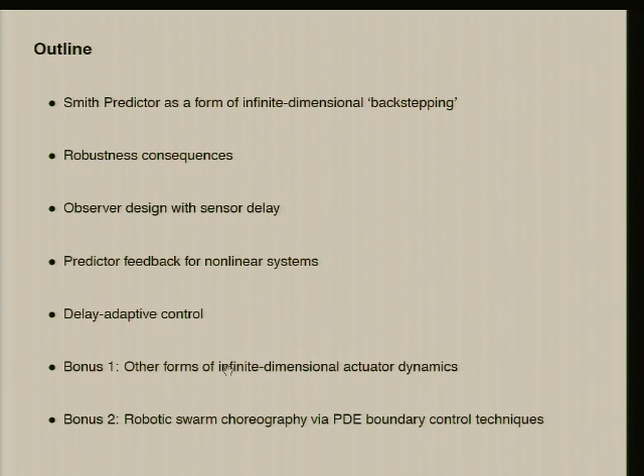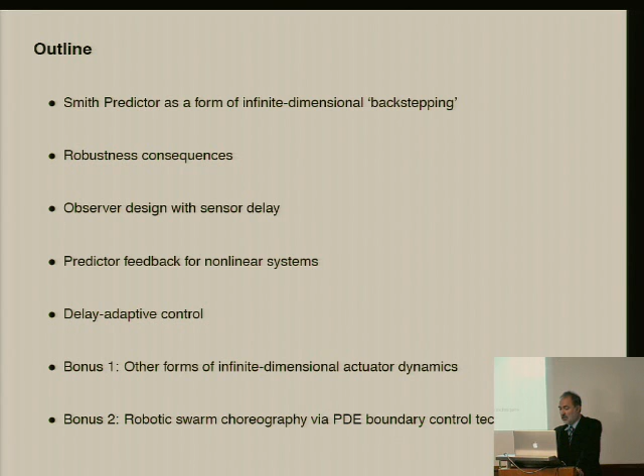And finally, just not to completely disappoint the network control systems people and people who expect such things in a CITRIS talk, I will talk about a new subject that is linked to control PDEs in robotic swarming or coordinated motion control.

So, delay systems arise in many applications. I don't think I need to spend much time on this slide. Probably you've been involved in at least one or more of these applications over the years.

And here's what I've learned after getting into delay systems. This is a topic that started getting some systematic and analytical attention in the late 1940s, starting with a paper by Tsypkin. It may not be so well known that there was a major emphasis on delay systems in the 70s and the early 80s, involving a large number of very prominent people that we know for contributions in other areas. In that period, many people were working on the so-called systems over rings, where the focus is on delay problems.

There was another burst of activity in delay systems after the introduction of LMIs in the 1990s, but many basic problems still remain unsolved, and it's still a very interesting area. So,

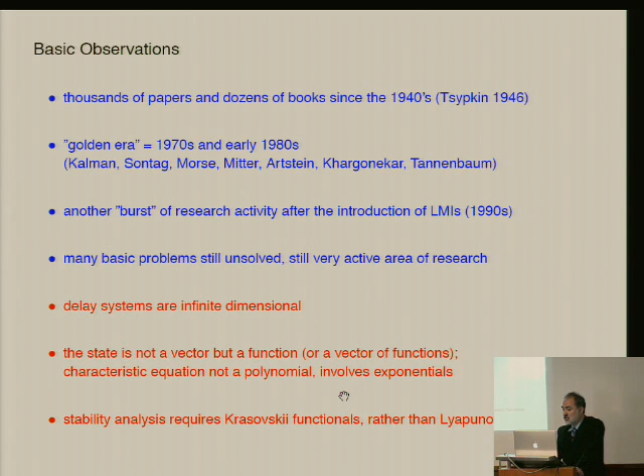what are the main technical observations about delay systems? They're infinite dimensional. The state is not a vector, but a function or a vector of functions. The characteristic equation is not a polynomial, but it involves exponentials. And the stability analysis does not succeed with simple Lyapunov functions, but it requires functionals, integral expressions of some sort.

Let me give you a flavor for what are the basic issues in control of delay systems through three scalar toy examples. So the first of these three examples, this is scalar. X is a scalar variable. This is a control. For d equal, when the delay is 0, this is an unstable system.

When the delay is non-zero, this is a very easy problem. You can either cancel this destabilizing term using the measurement of the past value of the measured state x, or you can actually dominate it using high gain. You don't have to exactly cancel it.

The next problem involves a delay on the input. That's a totally different problem. That is a problem that the Smith predictor and various other extensions deal with. That can be a very hard problem. And I will talk about that one.

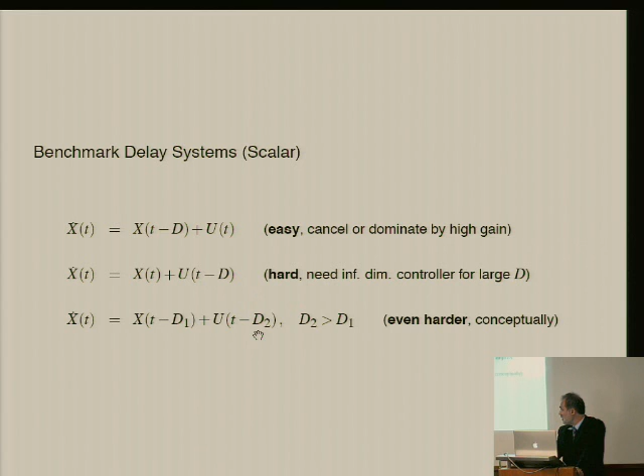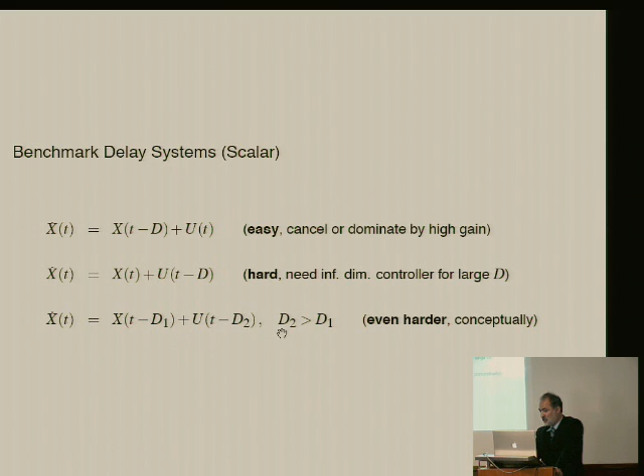The one that I will not talk about is a problem that involves simultaneous delay on state and control. Even when the state x is scalar valued, this can be a pretty hard problem, particularly if the delay on the input is longer than the delay on the state. And in the vector case, it's essentially unsolved at the moment. So I will focus on the second of the three problems.

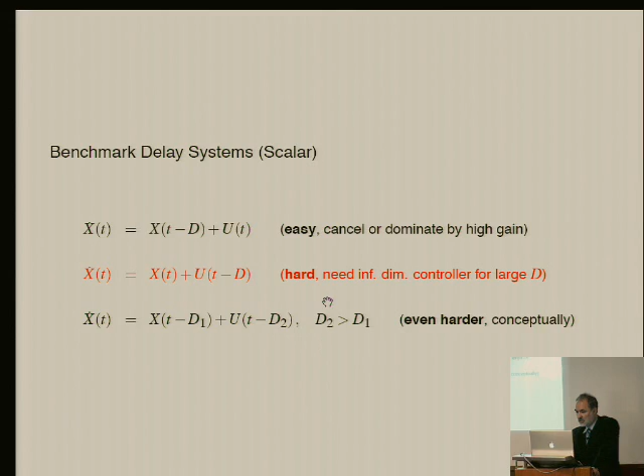So I have to admit that before getting into delay systems, I had not learned about these problems gradually. I knew close to nothing. I was working on control of PDEs and even didn't think that what I was doing would apply to delay systems. Simply because the results that I had up until that time were for PDEs involving at least 2 derivatives in space, whereas the delay involves only one derivative, only convective effect.

So I tried once, and here is how this went. This experience of mine, I think, is actually very useful. One can learn something and almost get excited about it.

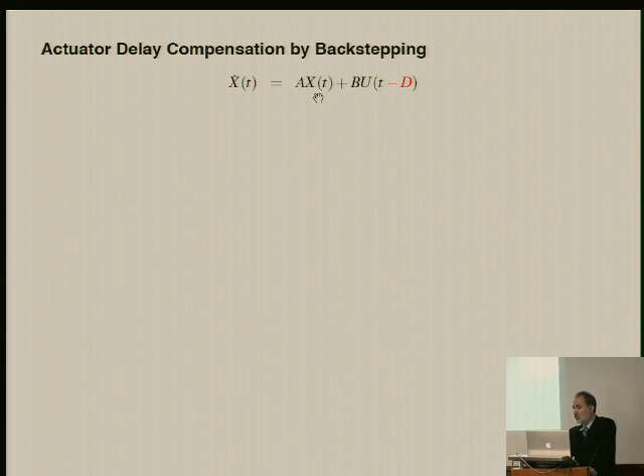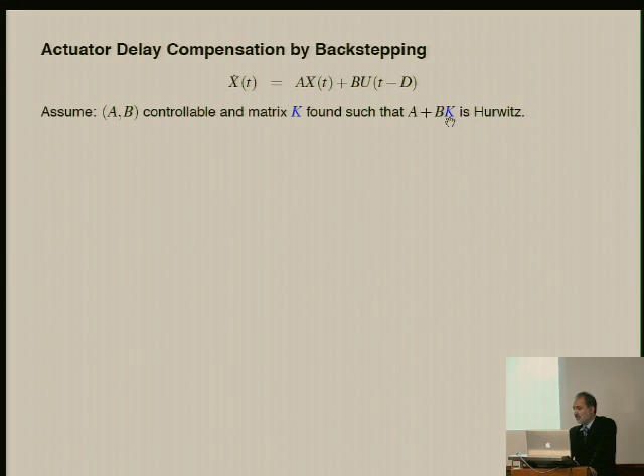So let me now consider a vector problem, so a full general linear controllable system with delay on the input. Let me assume that the pair AB is controllable, and let me assume that I have picked some nominal control K to stabilize the undelayed system. Now, let me go ahead and replace the

delay notation with a PDE representation. So let me represent this delay subsystem using a transport equation. So this transport equation is given here, this PDE. The output of the transport equation is the delayed input, and the boundary input into this transport PDE is the actual control.

So this is a very particular PDE, sort of the simplest of PDEs, and it can actually be solved in closed form if the input is given. So here's how the so-called backstepping method for PDE goes.

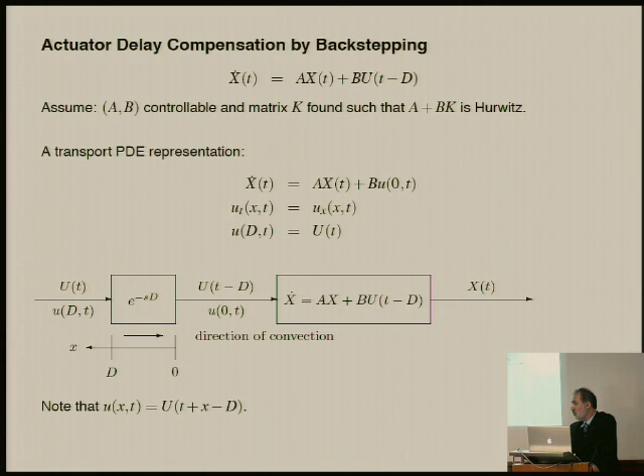Why think of this problem as a PDE problem? Well, because it is a boundary control problem. I have a cascade of a partial differential equation U with an ODE x, and the input enters at the boundary x equal to d of this PDE. So coming from that background, this is how you formulate this problem. Given that there are tools for boundary control in the context of this continuum or infinite dimensional backstepping, this is how you approach it.

You approach it by constructing an infinite dimensional transformation, a continuum transformation of the state of the actuator state U into a new state W. This transformation has a Volterra structure - this integral in y in the position y runs from 0 to the current x. So it's a lower triangular continuum operator, so to speak. There's also the ODE part in this transformation, which is crucial.

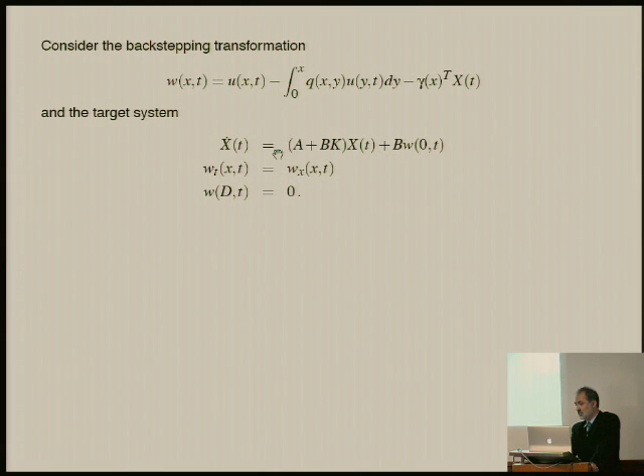Here's the objective: one wants to transform the original system into this target system using that transformation, and one wants the transformation to be invertible. This target behavior now consists of a cascade of a PDE and an ODE. However, the PDE is now an exponentially stable PDE - it's a transport equation with a zero input. So this thing goes to zero in d seconds. That exponentially stable system feeds into the stabilized ODE system. That's the basic premise of this backstepping approach.

After you plunge yourself into the algebra of determining the conditions when this transformation would achieve the conversion of the original system into the target system, you get these 4 conditions. This is also a cascade configuration. You have, in blue, an ODE - Gamma is a vector of the same dimension as x - and a PDE. Q is a function of 2 variables.

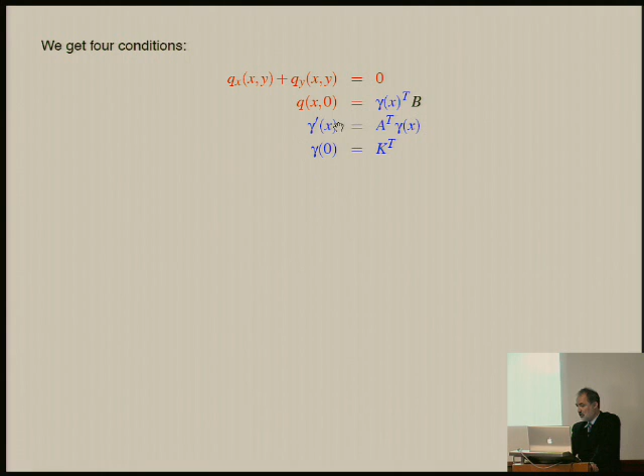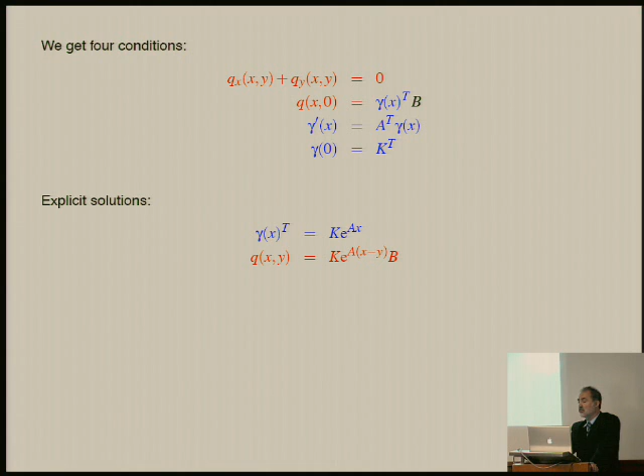You can actually solve both of them. The ODE just results in a matrix exponential, and the PDE can be solved because of its simple structure given this boundary input. So you get explicit solutions for both of these things. Rarely do we get something like that for more general PDEs like parabolic, second order hyperbolic, and so on. But for this delay problem, one can solve this explicitly. So plugging that in, here is the explicit solution of that backstepping transformation.

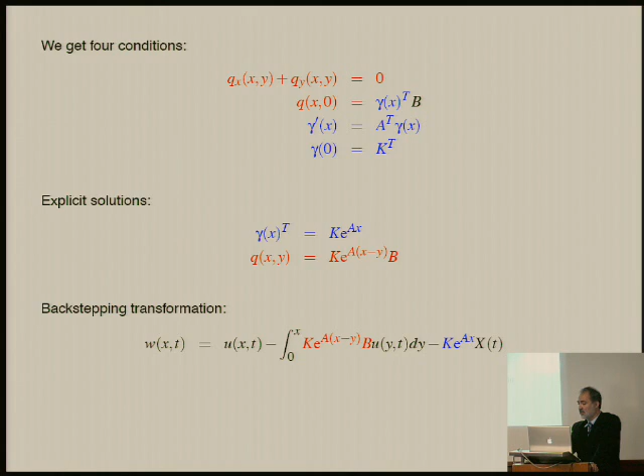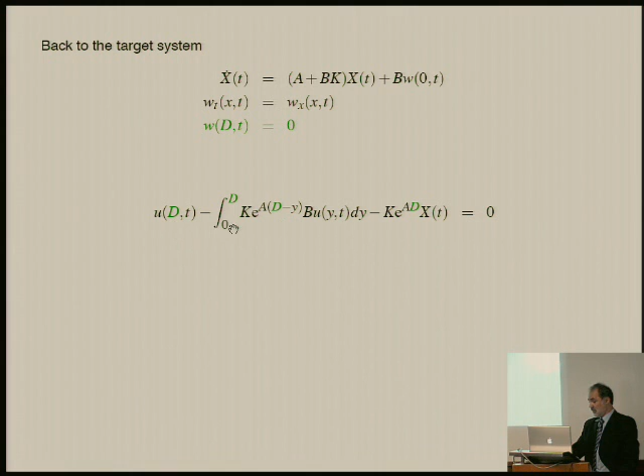Then that transformation is used also to pick the control. The control is picked from this condition in green, the boundary condition of the target system. As I said, you want your target system to be a transport equation with no input at all, so that its transient would vanish after d seconds. That condition translates into a feedback law. This u of d, that's the control input, and it needs to be defined as the rest in this expression. So I make that choice. This is my feedback law.

Let me now examine this feedback law. First, let me rewrite it into a form that is not the PDE-like notation, but the more standard delay-like notation. This lowercase u of d is replaced by the input u of t. The state of the actuator is replaced by the past values of the control. And here's what you get: a feedback law where the part in red is actually the nominal feedback. That's what you would use to stabilize the system for d equal to 0. The rest compensates for the delay.

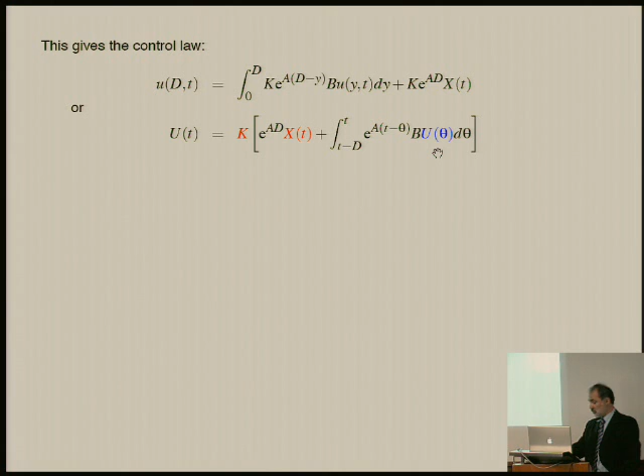So it should be no surprise that when you have delay and when the plant is unstable, the compensator asks you to use higher gain, because this matrix exponential of an unstable system would result in that. Also, there's this distributed delay, or integral term, involving past inputs. So that is the infinite dimensional control law that this backstepping method leads to.

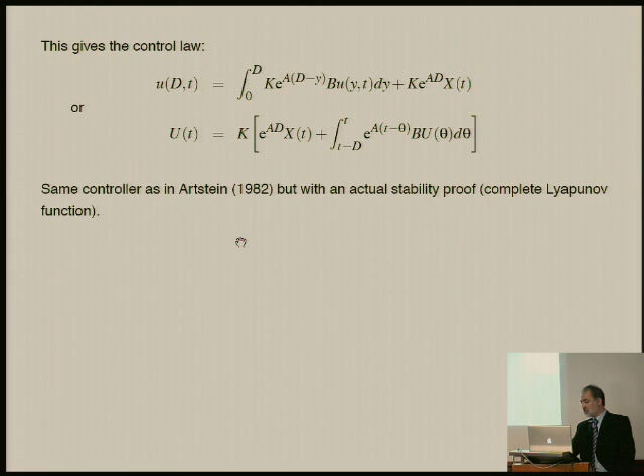I did not know originally if this was something new or standard. It turned out to be something that had been invented in the late 70s and explained in particularly crisp terms by Zvi Artstein, the same Artstein of Artstein's theorem on stabilizability using CLFs. So this feedback has been known for quite a while, but without actually a Lyapunov function, and therefore without a proof of stability.

Before Artstein, the people who actually came up with this compensator were Manitius and Olbrot in the late 1970s in the context of finite spectrum assignment. But it all goes back actually to the Smith predictor. The Smith predictor idea was to use a prediction of the effect of the input on the plant in the feedback law to compensate the delay and achieve perfect response after d seconds. The inclusion of this matrix exponential to account for the effect of the current state on the future one actually allows this predictor to work also for unstable systems.

The original Smith predictor was a frequency domain idea. It was only about 20 years later, I believe, that Manitius and Olbrot developed this as a state space formulation, and it's sort of been used since very much in that form.

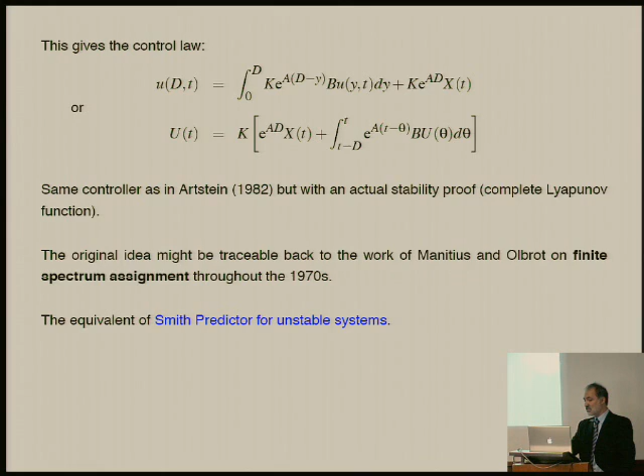So what's the use of this new view of the predictor feedback? The main new addition is a Lyapunov function in this constructive transformation of the actuator state. That is a large part of the state. You have an ODE and an infinite dimensional part of the state. Not having a Lyapunov function for what is 90% of your state is not having much. So the inclusion of the actuator state in the Lyapunov function allows for many nice things. The first is a rigorous proof of stability using a Lyapunov-Krasovskii-like functional.

So you see, this is the Lyapunov functional. It includes a quadratic finite dimensional part as well as this infinite dimensional part, scaled appropriately between the ODE and the delay part. So one can go ahead and prove that V dot is negative definite and so on.

But that's not the end of the story. That way one gets stability in terms of this transformed actuator state, whereas one cares about getting it in terms of the original actuator state, in blue. To get that, one needs to use the inverse of the backstepping transformation, which can also be derived and written explicitly, as I've given here. Then, using some L2 bounds between these two infinite dimensional states, one can get an exponential stability result in this norm.

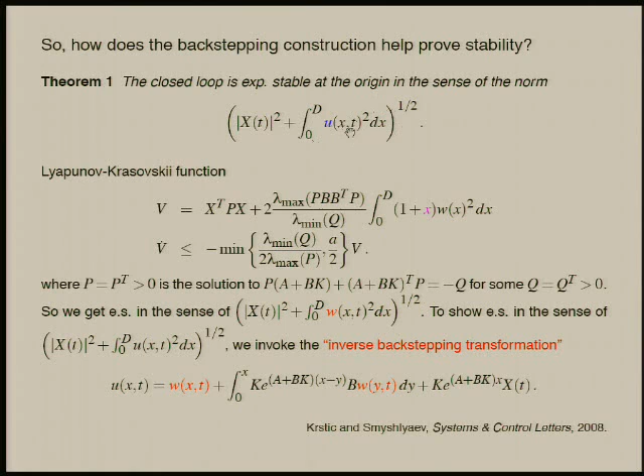So let me now step back and tell you where this all fits in, from my personal perspective, in boundary control of PDEs and backstepping in general.

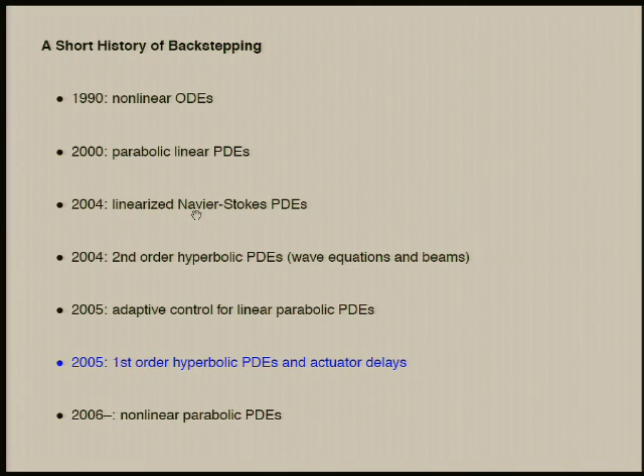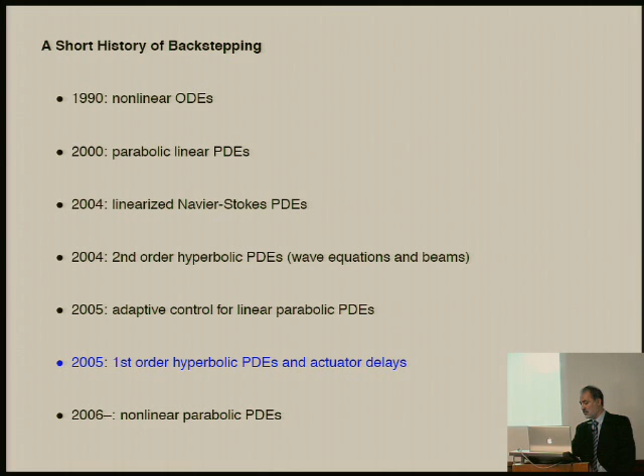In the 1990s, backstepping was developed for nonlinear ODEs. We started working on extending this to PDEs of parabolic type first, around 2000. The first major physically relevant class for which this could be applied are Navier-Stokes PDEs. Then I started looking into second-order hyperbolic PDEs, such as wave equations and beams. After that, with Andrei Smyshlyaev, we solved various problems of adaptive control for linear parabolic PDEs. So the first-order hyperbolic PDEs and systems with actuator delays, ironically, came after all this, although perhaps they could have come first. And just for the record, for the last couple of years, we've had some results for general classes of nonlinear parabolic PDEs with my former student Rafael Vazquez, who is at the University of Seville.

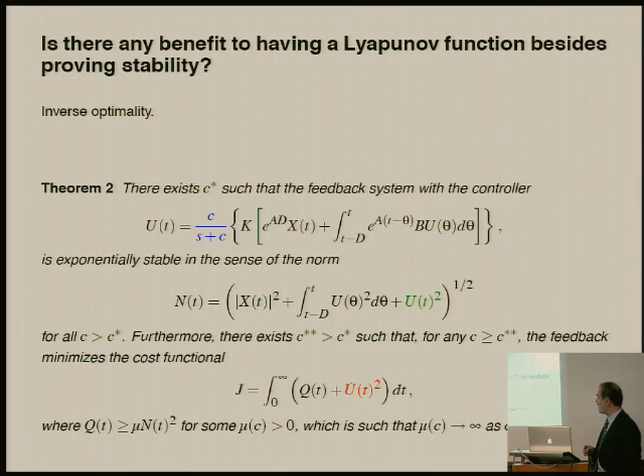So let me now talk about some other benefits of having a Lyapunov function. The first is robustness. I'll have to go fairly quickly through these slides, so I apologize that all the notation cannot be absorbed, but I will try to emphasize the important things in words. One benefit of having a Lyapunov function is that, having designed a stabilizing feedback law, you can pursue problems like inverse optimality.

So you have a stabilizing feedback law, and it is rather very hard to find an optimal feedback law for an infinite dimensional system, but you can pursue inverse optimality, namely finding a feedback law that happens to be optimal with respect to a cost that you might care about, a cost that is quadratic. That can be shown, and it can be shown in a rather unexpected and interesting way.

It can be shown that if you add this lag transfer function in front of the predictor-based feedback, you get inverse optimality when C is sufficiently large, with respect to a cost functional that imposes a penalty on the ODE state, on the distributed actuator state, and on the derivative of the actuator state. In other words, a penalty that sort of smooths the control action. That is not a surprising effect given that you introduce a lag filter, but proving it is quite non-trivial.

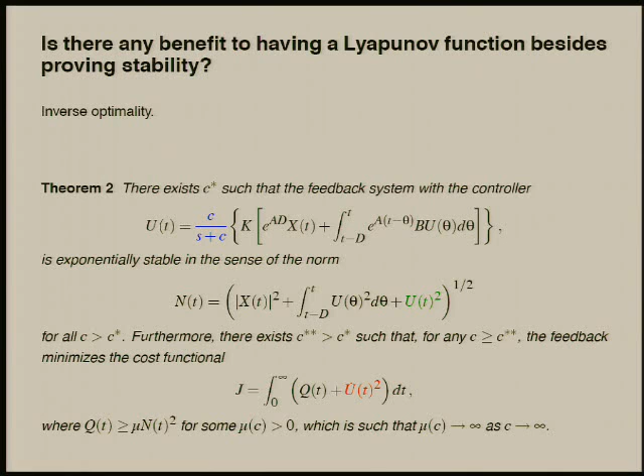And I'm emphasizing that C must be sufficiently large. You cannot put a really low-pass transfer function, then you would lose stability right away. But if you put a high bandwidth lag transfer function, you get inverse optimality without losing stability.

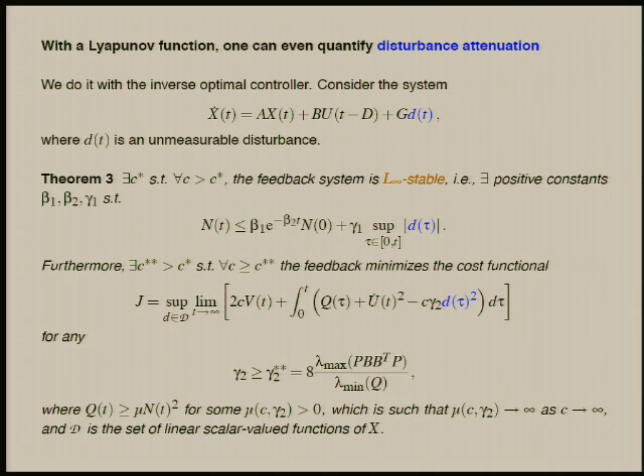The next result is very similar, but in the presence of a disturbance. If you have a disturbance, attenuation as a form of robustness to additive unmodeled effects can be shown, both in terms of input-to-state stability with respect to the same norm I showed before, as well as in terms of inverse optimality in a differential game sense.

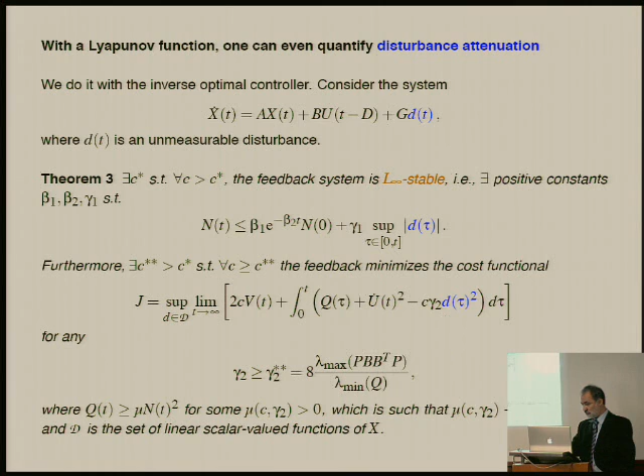All right, I'm sorry that I'm not giving you much time to digest the previous slide. This one is really important.

So, of all these forms of various forms of robustness, namely to initial conditions, to additive disturbance, there is one form of robustness that is particularly important, and that is robustness to the delay itself. If you're compensating the delay, and you get the delay, somebody gives you, or you estimate that delay value wrong, in the standard Smith predictor or in these modified Smith predictors, it's not obvious that this would work. And in fact, it's quite known that there are sensitivities to the delay error that are quite dramatic.

To make things even more dramatic, there are results for infinite dimensional systems, such as second-order hyperbolic PDEs, beams, and wave equations, that show that those problems have zero robustness to delay. You take an exponentially stabilizing feedback, you add infinitesimal delay, you completely lose stability. Stuff pops up on the right-hand side in the complex plane. Why is that? That seems to violate our intuition from finite dimensional systems. Well, our intuition from finite dimensional systems is based on the system's right-hand side being somehow a bounded operator, which is not the case for some of the PDEs.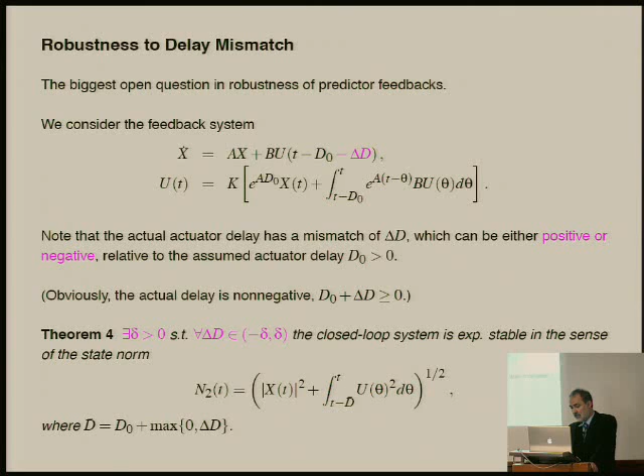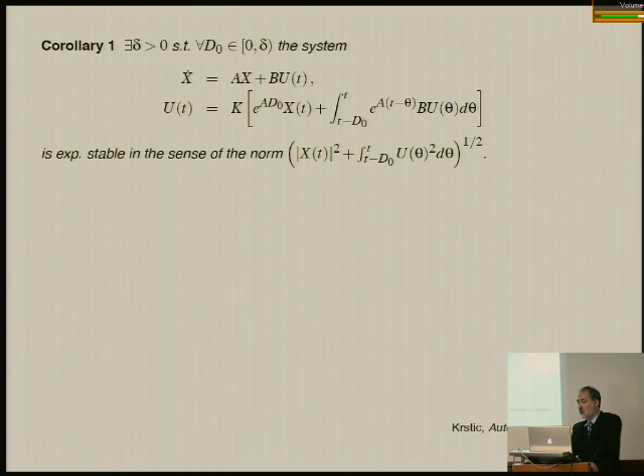So it turns out this result can be established. And just to fully appreciate it, here's a corollary of this result. Suppose you have actually no delay in the plant. It can be shown that the feedback system can tolerate a small amount of completely unneeded predictor feedback. So for sufficiently small d naught, you will not lose stability by using this infinite dimensional compensation on a system that is finite dimensional. It just needs a finite dimensional control.

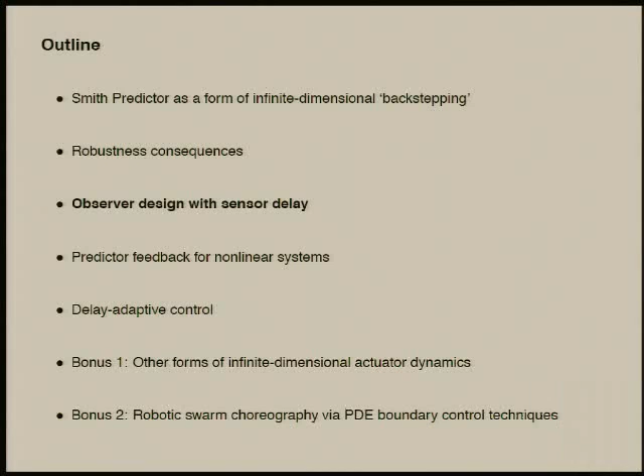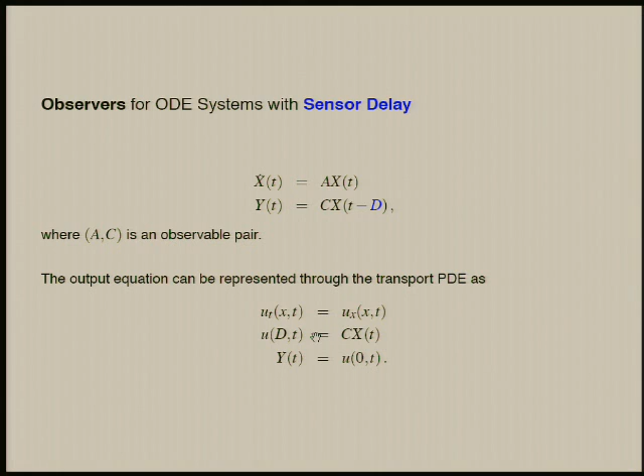All right, let me now say a few words about observer design with sensor delay. So suppose now that the delay is at the output of the system rather than at the input. I've not included the control input in this problem just to keep the slides clean — it can be included in the design, it's no problem. So this is a system with a sensor delay. This is its PDE representation. And this is the infinite dimensional observer of the ODE state through the sensor delay, as well as of the state of the sensors, the distributed infinite dimensional state of the sensor itself.

What you find in the past papers on observers for systems with sensor delay is the following idea: you estimate the state d seconds back, then you advance it d seconds in the future in open loop. So now dimensionally, that's the same — it's an infinite dimensional observer just like mine is. But the concept is different. That standard observer is like a reduced order observer, where what's not included is the entire sensor state. The consequences are that it's going to be more sensitive to noise because there is an open loop component to that.

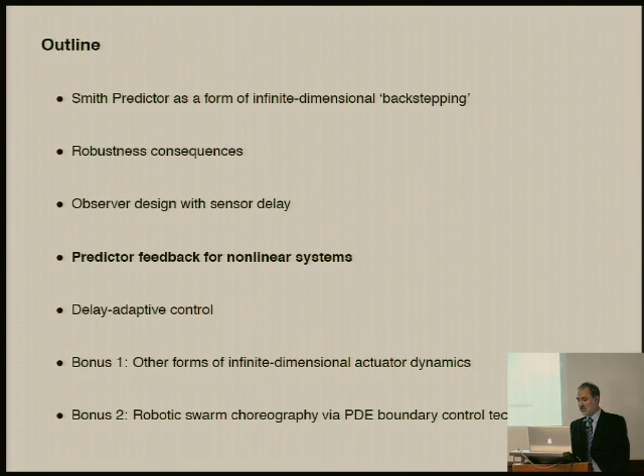All right, now let me get to the part which is only a few pages, but which basically captures my whole abstract. That's the application to nonlinear systems.

So about 10 years ago, Andy Teel proved a robustness result to sufficiently small delays for globally stabilizing nonlinear feedback laws. What happens when you take a globally stabilizing feedback law for nonlinear systems and you have an actuator delay is that you first lose in the sense of the region of attraction, and then as the delay grows, you completely lose stability. But there is a robustness result that is sort of semi-global in the delay. This is not a design or redesign result, just an analysis result. Since Andy Teel's result, there have been efforts in developing nonlinear control laws for nonlinear systems with delays.

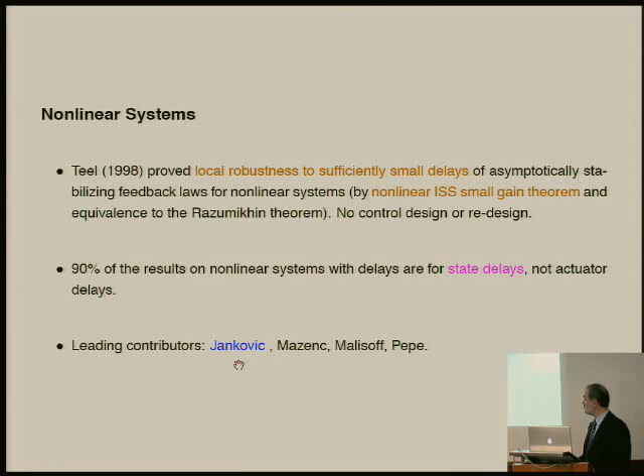Much of it is for systems with state delays, not actuator delays. These are some of the most prominent contributors, particularly Mrdjan Jankovic from Ford. He has a whole set of very interesting results for various structures of nonlinear systems with delays.

So let me now formalize this. Let this be an ODE, a vector ODE, so let Z be a vector, and let's assume that there is actually a delay. Let's also assume that a globally stabilizing feedback law, kappa of Z, is known for this system. So what do you do? How do you design a predictor feedback law for this problem?

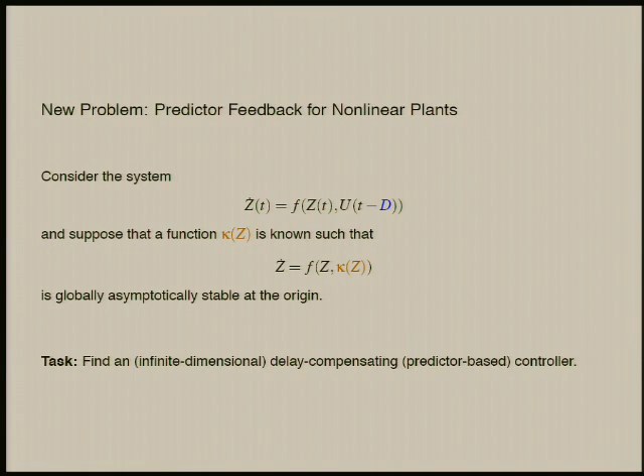So let me say one thing. This is a nonlinear plant, so you do not expect things to be easy here. For linear plants, we needed an infinite dimensional feedback law. So this has got to be infinite dimensional and nonlinear on top of it. Okay, so here's what it is.

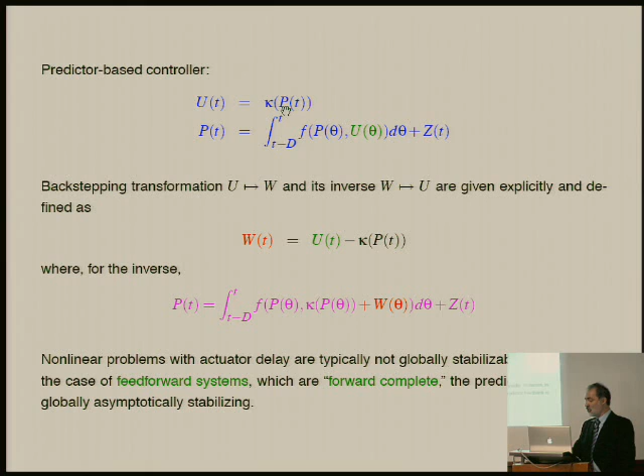The feedback law, very interestingly, is given in terms of the original function or formula, but applied not to the current measured state, but to the predictor of that state. That predictor can be obtained using this integral operator representation. This, unfortunately, is not an explicit representation like in the case of linear systems. It is an implicit representation, unless you know how to analytically solve every nonlinear system, which we don't. So it is infinite dimensional, nonlinear, and given implicitly. It can be calculated numerically, but this is what it is theoretically.

I should also emphasize one big problem with nonlinear systems. Linear systems don't have finite escape. So in the presence of actuator delay, when the system is just waiting for the first values of feedback to kick in, nothing dramatic happens. The system runs in open loop, then the control catches it. For nonlinear systems, you can have finite escape in the first d seconds, and the things are over.

So nonlinear predictor cannot be expected to hold globally. However, there are certain classes of systems for which global results can be obtained. One class is the so-called forward complete systems. These are systems that, despite being possibly unstable, do not have finite escape.

What are examples of such systems? Well, many mechanical systems that we know do not explode in finite time. They have nonlinearities involving a lot of trigonometric functions and so on, and things remain bounded for all time. So predictor feedback works in principle for those things.

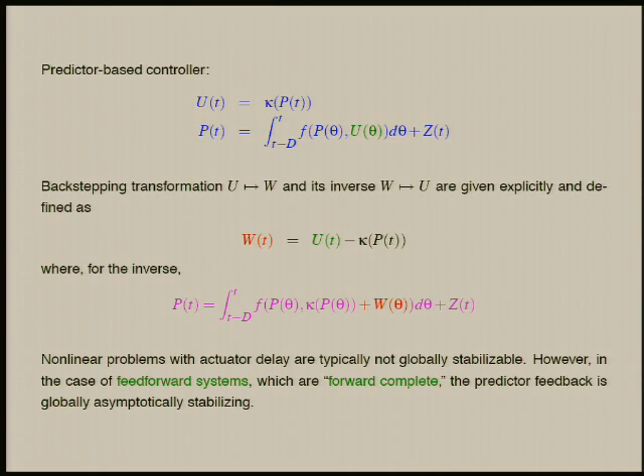All right, I will show you one example that actually can have a finite escape. So, keeping it very honest, I'm taking a really bad example. Before the control kicks in, this scalar ODE could have had a finite escape.

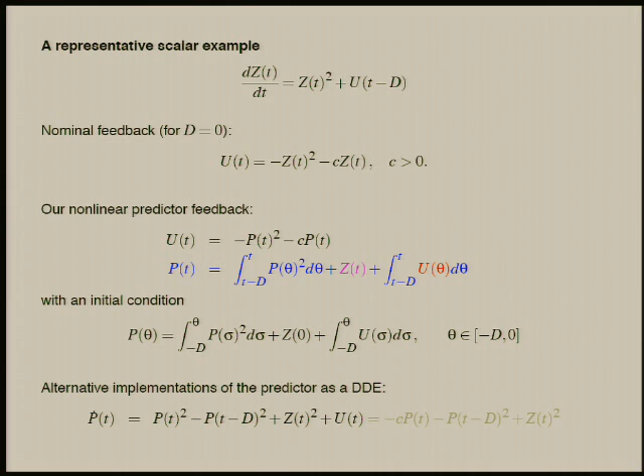I apply the predictor in the way that I described on the previous slides. I will skip that, I think it's pretty clear. You basically run a predictor of that. I will skip these details. Let me tell you what the result is.

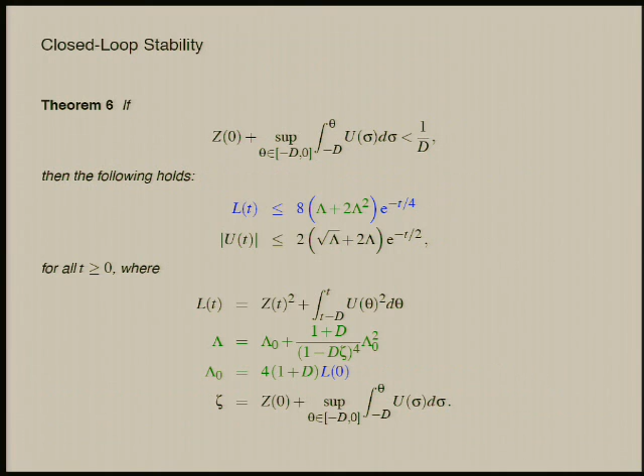The encouraging result is that you recover a region of attraction basically globally. If you do not escape to infinity over those first d seconds, the open loop period, the predictor feedback will achieve stabilization for all the initial conditions.

The interesting part is the form of the stability estimates. L is basically the norm of the ODE plus delay part of the system. The norm is bounded exponentially in time, but not linearly in the initial value of that norm. You see, this lambda appears quadratically, and lambda itself is quadratic in this lambda naught, where lambda naught is linear in the initial norm, and so on. So there is a fourth order effect there corresponding to the presence of a quadratic nonlinearity in various transformations in this problem.

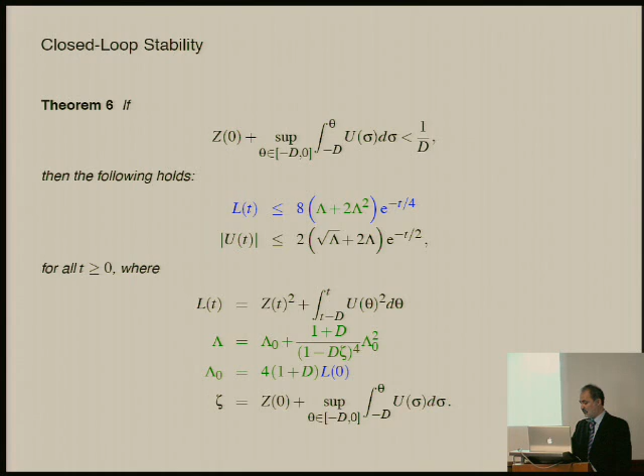It's worth asking the following question: what if my system does survive the first d seconds and I apply the uncompensated feedback? Will I be home free? The answer is no. This can also be proved: even if the initial condition is such that you do not have finite escape over the dead time of the input, for sufficiently large initial conditions that fall within that set, you may have a finite escape over the next d-half seconds.

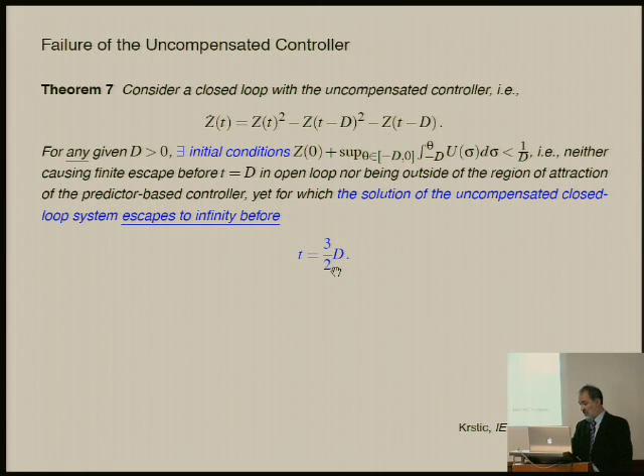All right, let me now say a few words about adaptive control. I've had to trim down some slides to not go too much over time, so I've trimmed down some references.

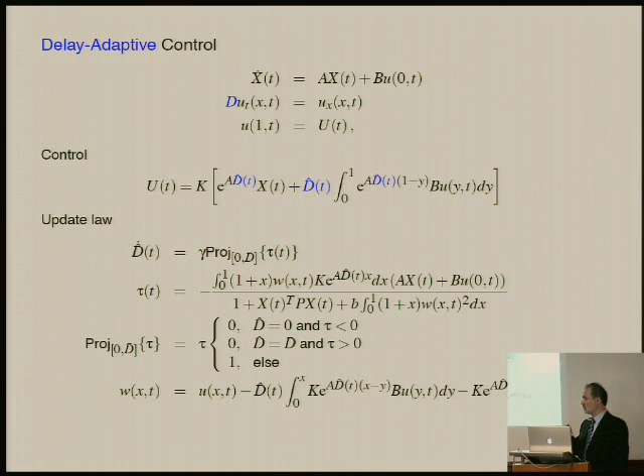Adaptive control systems with delays, and specifically adaptive versions of the Smith predictor, have been developed by a few people, such as Annaswamy, Niculescu, Ortega, Lozano, and so on. The parametric uncertainties are always in the ODE, while the delays, no. The real interesting problem is when the delay itself is unknown, and on top of that, possibly the ODE parameters. But the delay, that's the hard part, because the problem is nonlinearly parametrized in the delay, at least if you look at it without the transport PDE representation.

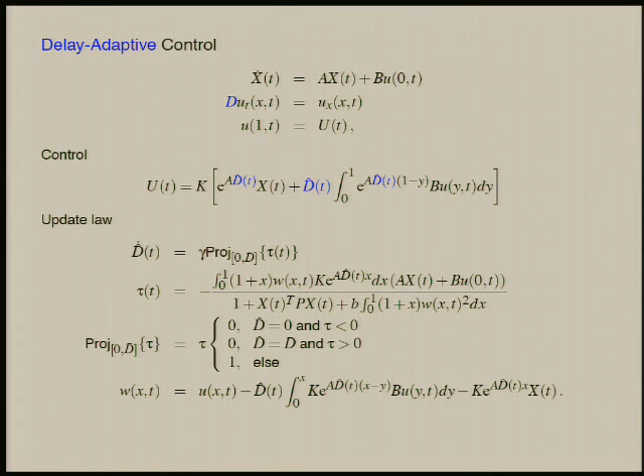So here is an adaptive controller for a system where the delay D is unknown. This is a slightly different representation than the one I've used before. In this one, the convection speed is 1 over D, and D is unknown. So this is the adaptive version of the predictor feedback. D hat is an estimate generated from this update law. The details would require more time, I will skip them. But this can be designed, and it can be proved to be globally stabilizing in the following sense.

You do not expect global exponential or global asymptotic stability from an adaptive system. You get global stability, and for this system, you get global stability with this exponential estimate in terms of the initial norm. The norm captures the effect of the ODE, the actuator state, and the parameter estimation error. In addition to that, you get regulation of the ODE state and of the actuator. So all of those things that you would want to get, you can get them globally with this design. The Lyapunov function is not standard. There are tricks in here that go beyond this compressed talk. The Lyapunov function involves a log and so on, and various other things I have to skip.

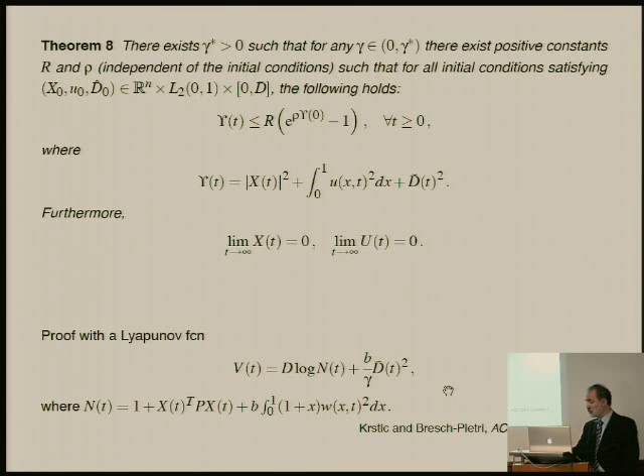I had a wonderful collaborator on a part of this project that came after this theorem, involving extensions to systems with unknown ODE parameters: French student Delphine Bresch-Pietri from École des Mines. These are her simulations, which, if one had time, show very interesting things.

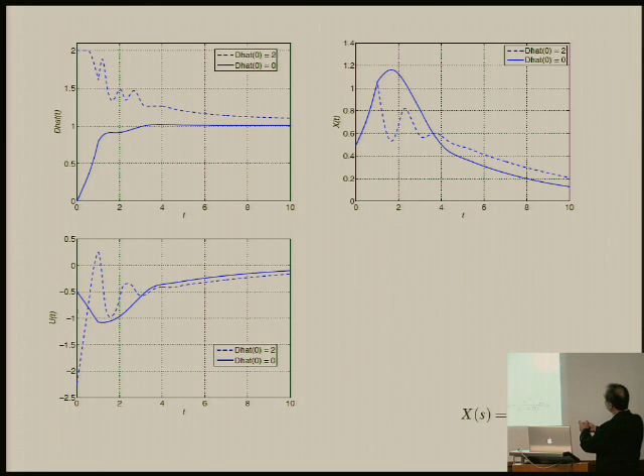So this is the plant. It has actuator delay, and it's open loop unstable. Scalar plant, just to keep it clear. There are 4 segments of behavior, 4 intervals in time that are very interesting here. So the delay is 1 second. Over the first second, this is the state x. The state grows exponentially in open loop. Then the control kicks in and things start improving.

Now look at the delay estimation error. This is for 2 different initial values of the delay. Basically, the delay is estimated quite well, or well enough, over the first second or so. The true value is 1, so you get pretty close.

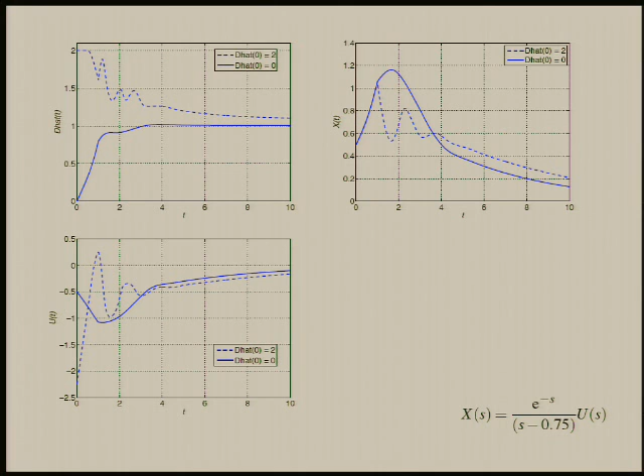Once the control kicks in, things start changing. But things really start changing for the better only after the delay has been properly estimated, which is at around 2 seconds, and that takes effect on the delay system at about 3 seconds. So it's only here that the system basically runs like a linear system. You see an exponential transient, whereas initially you see an exponentially growing transient, this nonlinear transient, and a linear transient of the system. So that's an adaptive system.

All right, let me switch to some of the last comments here. One can have a lot of fun with these. As I said, I came from the PDE side, and now I went back to the PDE problems.

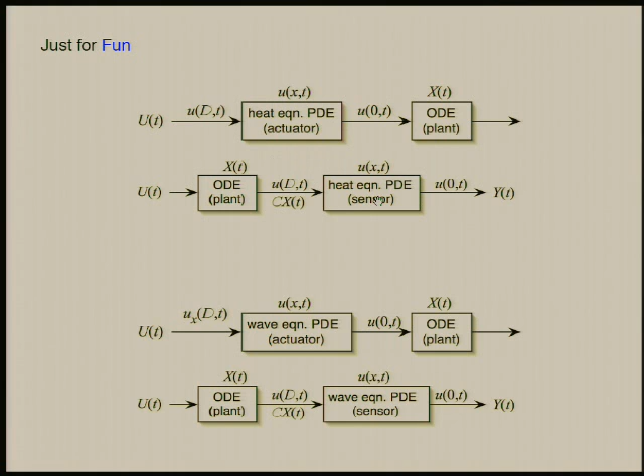Rather than having a delay at the input, I've considered problems where you might have a more complex PDE at the input, such as, for example, a heat equation or a wave equation. I could allow it in the actuator or in the sensor. So I've designed controllers and observers for all these problems: heat equation to ODE, ODE to heat, wave to ODE, and so on. Let me just show you some of these things.

So here's how the things change. Remember, in the delay predictor, this is the form of the feedback law. There's a matrix exponential coming here to amplify the measured state, and also in the control compensated part. Well, when instead of a delay you have a heat equation at the input, things get second order because of the second derivative in space here.

If you want to see it another way, ask yourself: what is the transfer function of this infinite dimensional actuator dynamics? For the delay, I know what it is, it's e to the minus sD. Well, for the heat equation, it is 1 over the cosine hyperbolic of the square root of s. This would be really, really hard to guess. This feedback compensation is actually very intuitive: you're running the system forward D seconds. This is not. How would you guess what this is for dynamics that are not solvable analytically, unlike the delay problem?

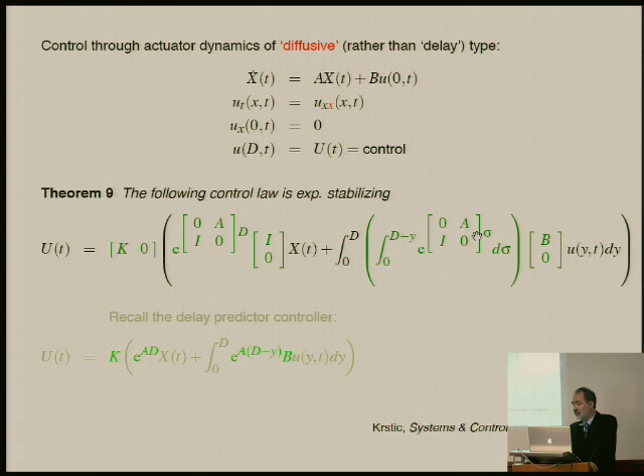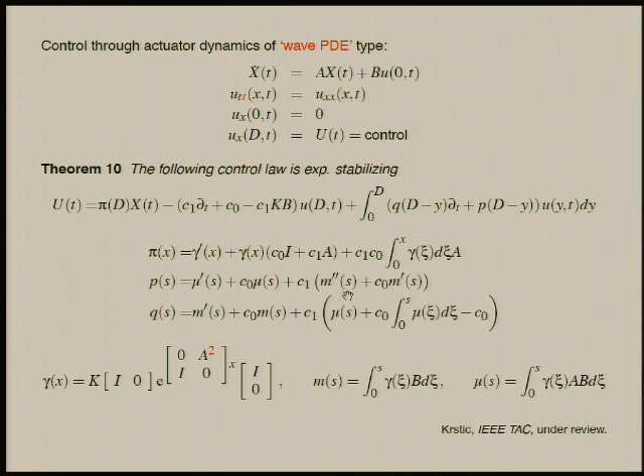I did this also for the wave equation problem. The wave equation problem is even more difficult because it's second order not only in x but also in time. So you see this matrix exponential is of this second order form, but with the state matrix squared, so to speak. And there's no time to elaborate on the details of that.

I've had even more fun, almost an unhealthy amount with these problems. I've looked at cascades of PDEs. First, a delay at the input, not of an ODE, but of a PDE. This is an unstable PDE, this reaction diffusion equation.

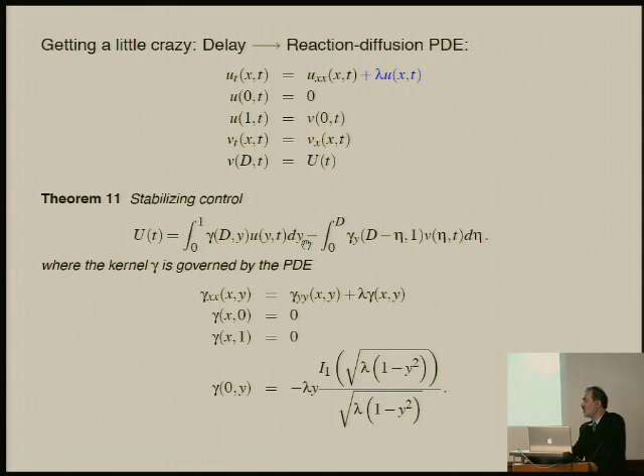So what is a predictor feedback for a PDE? Well, this is what it is. It is given by a formula. And to compute the gains into this formula, it's quite interesting. First, you need to find the gain formula without the delay. This is this expression involving a Bessel function. Then you have to take that as an initial condition and run this for an equation that is the same as the plant over d seconds, and that's how you get the gain expressions for this system.

So that's for a parabolic form. One can do this also for a hyperbolic equation. This gets more complex. This was done not for a wave PDE, which is neutrally stable, but I've looked at it for an anti-stable version of a wave equation where you have all of the infinitely many eigenvalues in the right half plane on a vertical line. So that problem can also be solved using explicit gains.

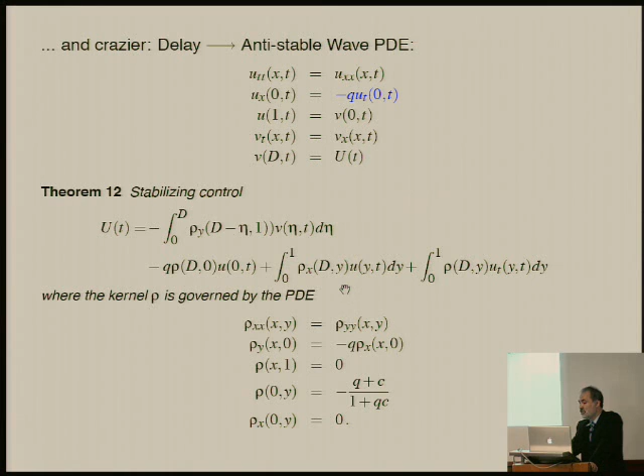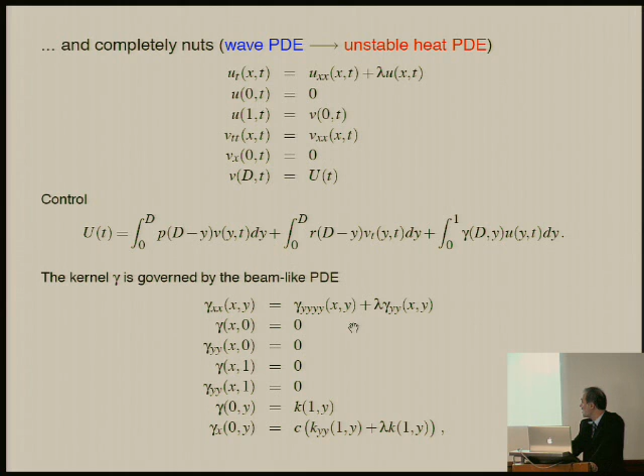And then just a final bit of craziness is looking at a cascade of two PDEs, a wave equation with an unstable heat equation. So that also can be worked out, and some very interesting PDEs come up, like this beam-like PDE with fourth derivatives, but for determining the gain.

So anyway, I think it's pretty clear there is so much still in this area, and I'm talking here about clean results, stuff that does not involve stretching problems, looking into robustness, but just finding basic solutions to these problems. There is so much one can still find in the area of distributed parameter systems and delay systems.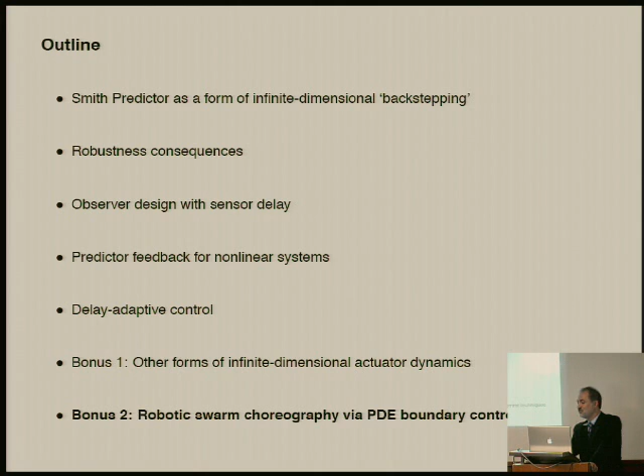All right, so now finally, let me show you one more thing that I like very much. So if you are not in mechanical engineering, or especially if you are in mechanical engineering and civil engineering, and if you don't care about this kind of problems, mechanics problems, well, shame on you. But what I've shown you so far is mostly motivated by mechanics, PDEs, and other problems in electromagnetics. So you might not care about them after all, if your interest is mostly in robotics. Well, I want to show you that you still might care about them.

So here's a problem in distributed robotics, or coordinated motion control, or swarming. There was a talk recently in CITRIS that talked about network control systems. Here's a problem with a network of autonomous agents. So this notation here represents lowercase ui and vi, the position of an agent i. Capital U and V are the control inputs of a fully actuated agent in both x and y coordinates in a plane. So imagine a network of mobile robots.

The standard thing that is done for this kind of networks is to induce some swarming behavior, some coordinated, intelligent-looking behaviors using simple feedback laws. These simple feedback laws typically are nearest neighbor-based feedback laws. Each mobile robot talks to two other mobile robots. There's some communication topology, which in the most basic case is a chain. And these robots apply these simple feedback laws, and yet they can induce some behaviors that are relevant, such as rendezvous or deployment into a line. So that's the problem.

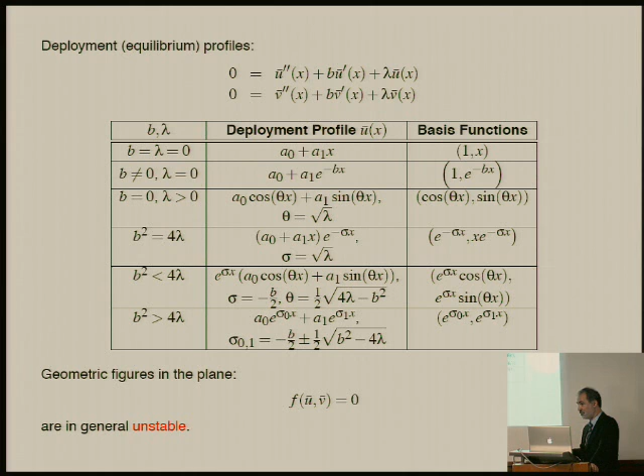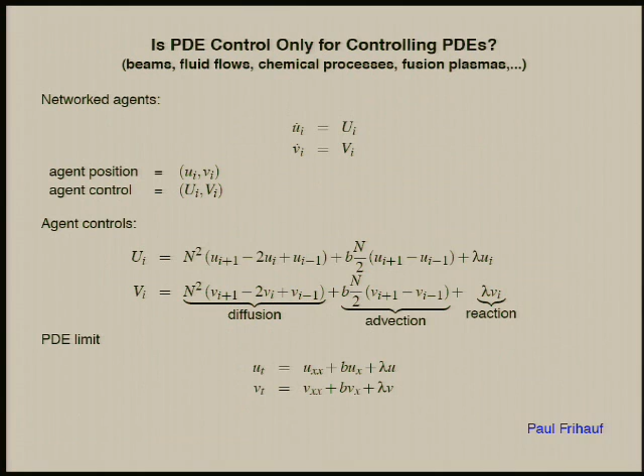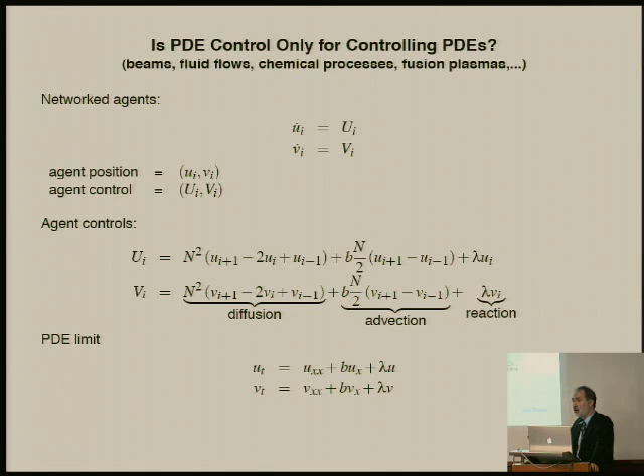So we achieve this with my new current student, Paul Frihauf. We achieve this by designating one agent to be the leader of the formation, and this agent acts like a boundary controller in a PDE problem. This agent monitors only one neighboring agent, estimates the state of the whole formation, and applies feedback. He manipulates his own position to manipulate his neighbor's position, so that the neighbor influences his neighbor and so on. In this way, a stable deployment is achieved into non-line type of configurations.

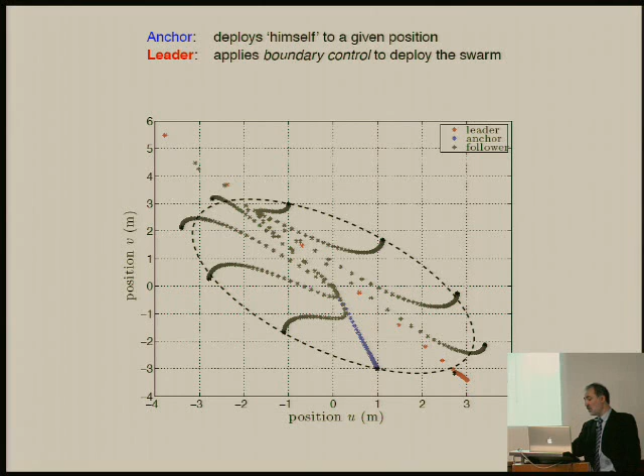So here's an example. This set of mobile agents starts from a rendezvous, starts from the origin. Then the leader agent, this guy in red, induces the deployment into this ellipse. So one can induce various other things, including, for example, a hyperbola, a spiral, and so on.

In fact, I do have a movie that I would like to show you that takes you through a whole choreography of motions of this set of mobile agents. In this initial state, the dark straight lines indicate the communication topology between these agents.

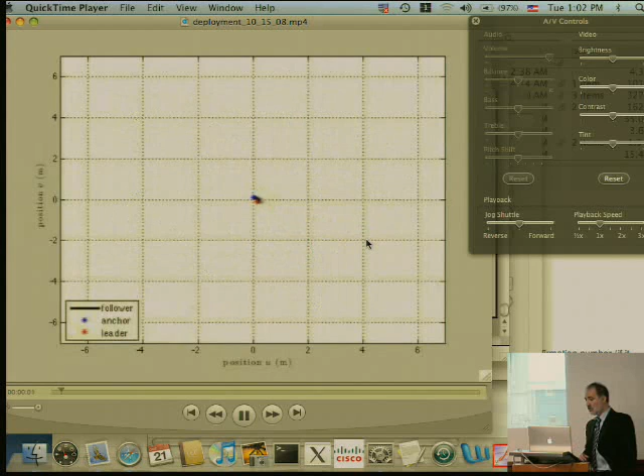At each corner there is an agent, and the red guy, that's the leader. So starting from some random distribution of these agents, we first go into a rendezvous, then into a straight line. So that's standard. And from that point on, these are novel feedback laws for various figures.

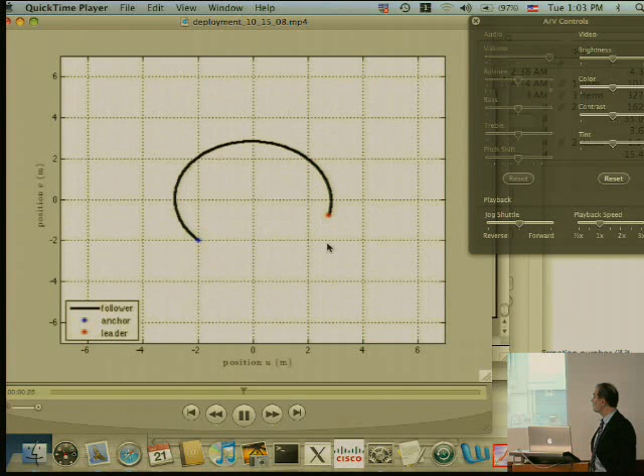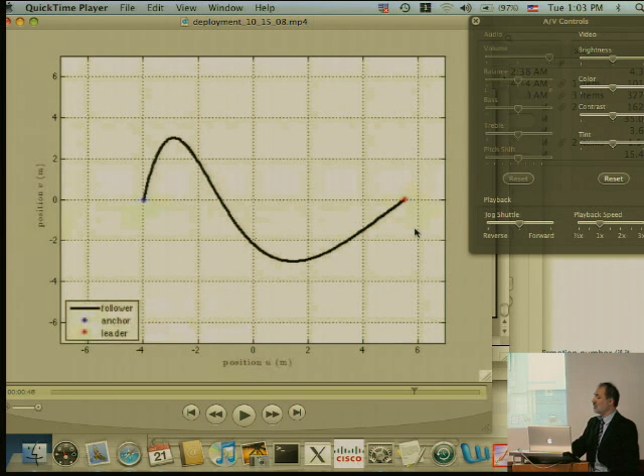Now this is particularly hard, because this spiral is a very, very unstable configuration. The agents need to have a feedback law that induces two unstable eigenvalues. This is a sinusoid, but distorted in the x direction, which can be obtained as a composition of a sine and an exponential.

So back into a rendezvous before deploying into a figure 8. This again is quite unstable, but it's doable. So with that, I want to apologize for going a few minutes over time, and I'd be happy to take any questions.

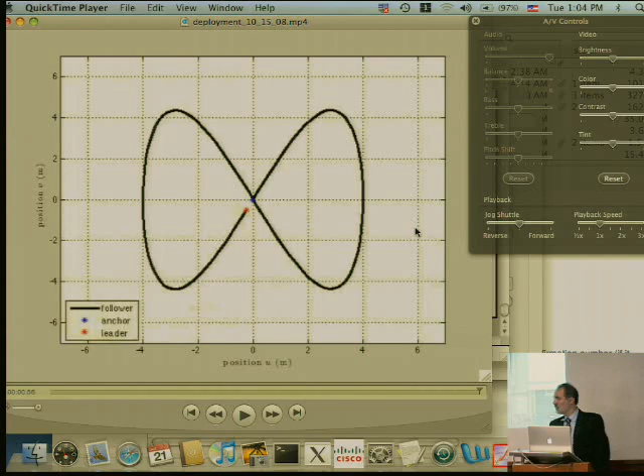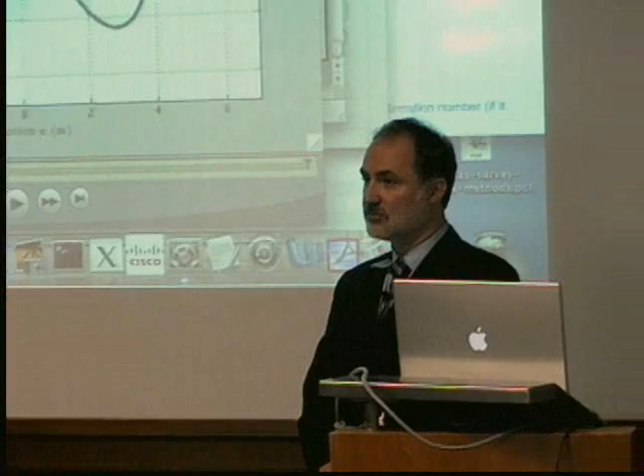Hi. So one of the questions I want to ask is about the form of the controller you have. You have a static gain and a prediction of the delay, two terms, right? From an engineering point of view, is there a relation between model predictive control? Because in model predictive control, what we do is synthesize control laws based on predictions of future uncertainties. So I think this might have some bearing on the predictive control strategies used in process control, for example. Secondly, can we actually increase the delay margins by increasing the class of control strategy to be causal in the past states, especially if there is a delay? Because the current control law only uses the current state, not any past states. So I was wondering if the delay margins or robustness margins could be increased.

So the second question, possibly you're right, I hadn't thought of that. I'm not sure I could provide a result in that direction, but perhaps something involving LMIs. There's this whole community that postulates certain forms, applies the LMI formalism, and determines conditions such that such forms of feedback are stable. So that's a good idea, and maybe it would be successful in some cases. About MPC, let me quote my colleague Bob Bitmead, who says that MPC essentially embeds a predictor into the solution. So I wouldn't say this is the only way to do it. It's a clean way to do it, though. And for PDEs in particular, I guess at this point it's the only way to do it.